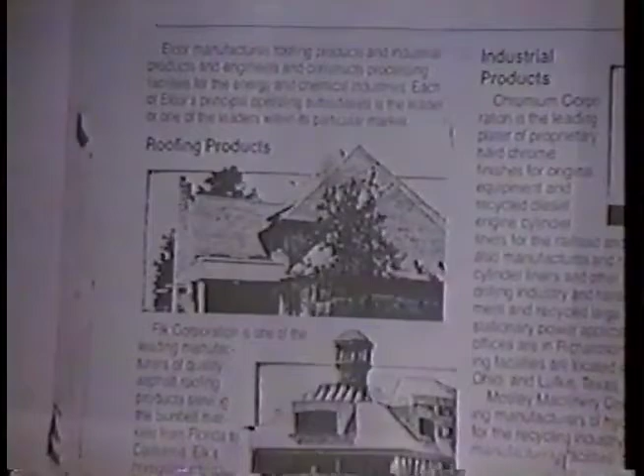We are owned by a larger company, the Elcor Corporation. They have subsidiaries in roofing products. We do have fiberglass roofing plants in the south and on the west coast. That seems to be the biggest subsidiary. We have an industrial products group, of which we are a part. We're also into engineering and construction of cryogenic technology and natural gas processing equipment through our ProQuip Corporation division. Chromium Corporation is the largest in its field and has been a leader because of its relationship with the OEMs for a number of years.

As I said, we do have a working relationship with Cooper on new parts. That was formally announced in 1985. As a result of Cooper's requirements, we are also nuclear certified. That means that we have a system in place for the tracking and meeting all the requirements necessary to do work on nuclear components.

But what we want to talk about today is chrome itself, how we do it, not so much why it works, but we'll touch briefly on some of the characteristics of chrome: how it works, why it works, and our particular process for finishing. One thing to keep in mind through this whole thing is that chrome is the hardest metal you've got going in the operation of your engine.

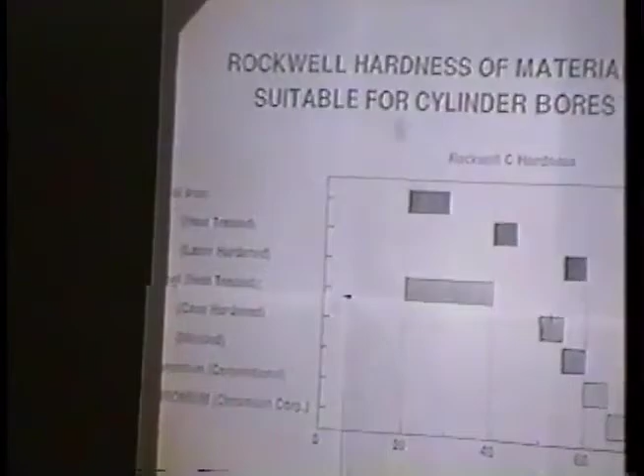Okay, when we talk about chrome, inherently you're talking about the hardness of the metal. Here we have a chart which compares, according to Rockwell C hardness, cast iron, heat treated and laser hardened.

I didn't get all my stuff together here.

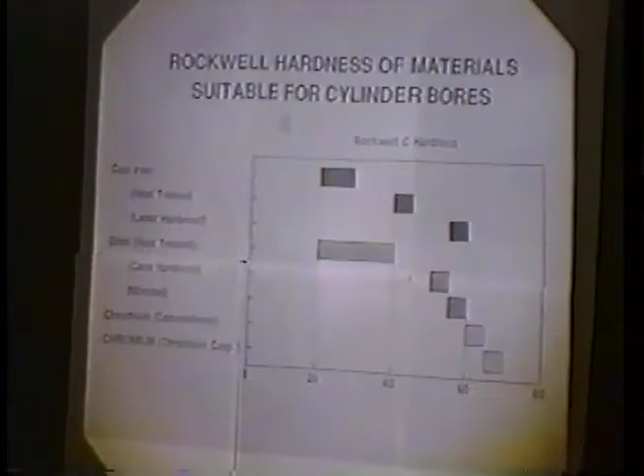Which ranges between 20 and 30 Rockwell.

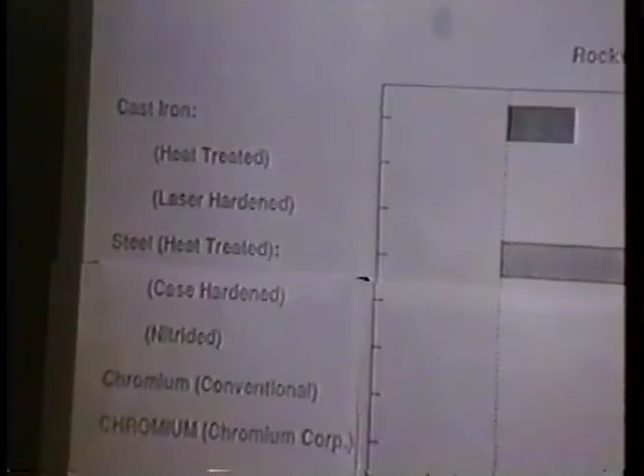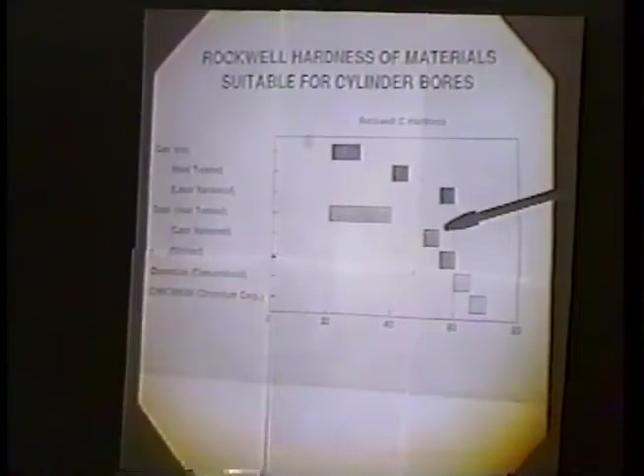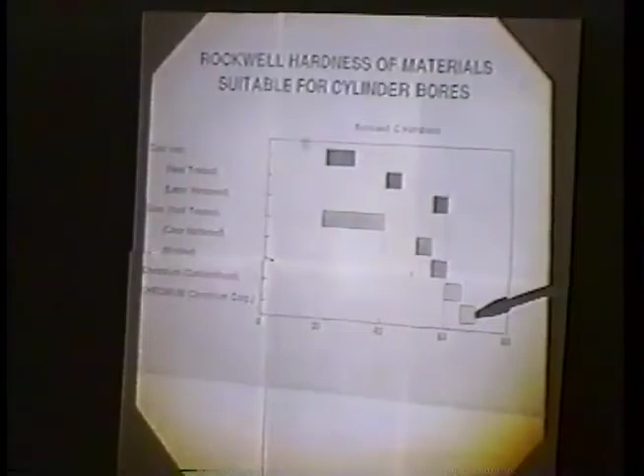And then you have the heat-treated steel, case hardened and nitrided, with those hardnesses out here in the 50 to 60 range. And then conventional chrome plate and our proprietary chemistry. The hardness of chrome can be controlled by the type of chemistry that you use in the plating bath itself.

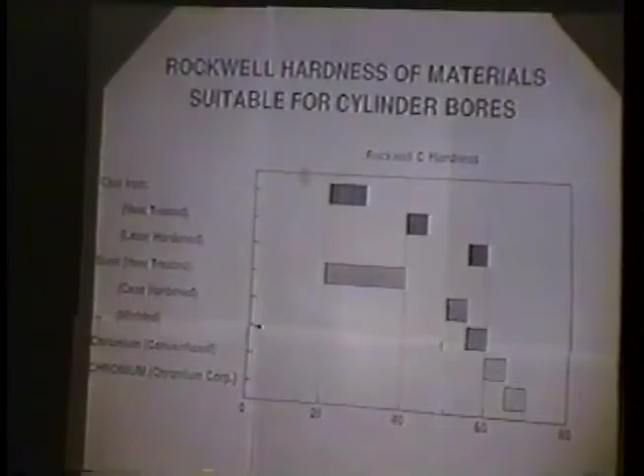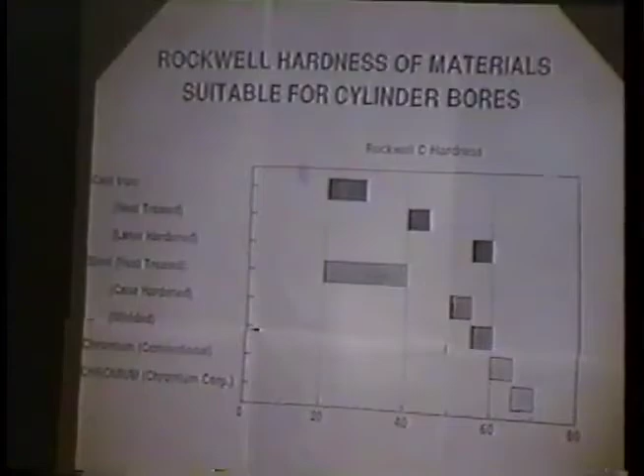Since we've been in the business for as many years as we have, we've developed our own chemistry, which has some added benefits to it, basically resulting in a little bit of a harder chrome product than the conventional, or what you might call off-the-shelf type of chemistry that anybody can buy from Harshaw or DuPont or those kind of people. And that's generally the chemistry you'll find in a lot of the shops around the country, because there's no real chemistry involved with it. You just put it in, that's the way it is.

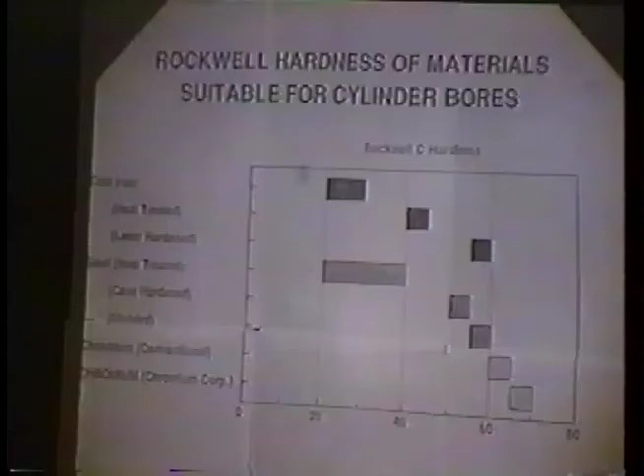But with ours, there's a great deal of maintenance that's required, and we do employ chemical technicians in all the facilities to keep up with the chemistry. Relating the hardness to specific other types of metals, the hardness ranges on the Knoop scale from 400 to 1100 Knoop, or 41 to 72 Rockwell C, which you saw on the other chart, dependent upon the chemistry.

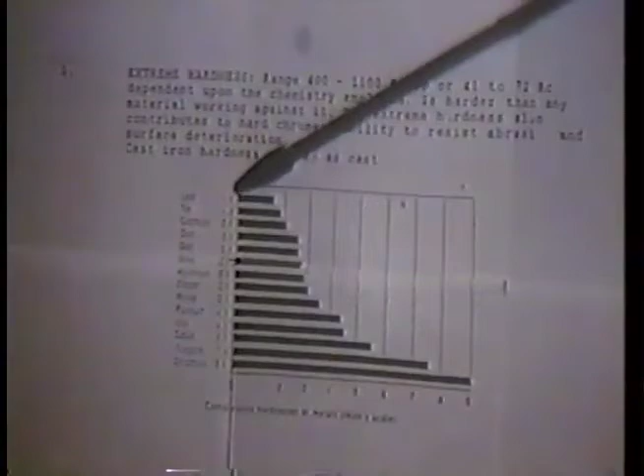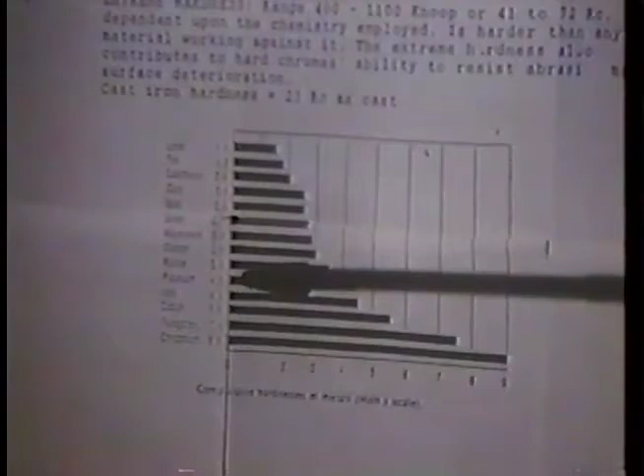This is a scale of various metals, starting with lead, working its way on down to chromium, and ranking those metals in degree of hardness against one another. In the center here, you'll see copper, nickel, aluminum, going on down through cobalt and tungsten, and chromium still being quite a bit harder than tungsten is.

One of the other good things about chrome is that it is a very good conductor of heat. I didn't ask, can everybody see that okay? Specifically, it will conduct heat 5.6 times greater than cast iron will, 6 times greater than ordinary steel.

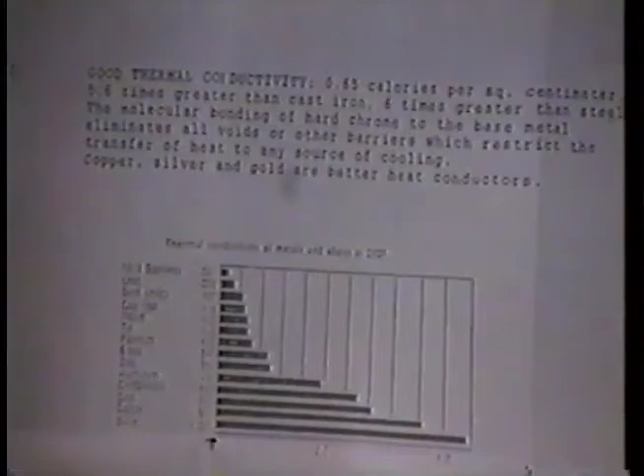The molecular bonding of chrome to the cast iron or the base metal itself eliminates voids and barriers to the transfer of heat. It is a molecular bond, and you'll hear that later on as we get through this. Molecules of cast iron combining with molecules of chrome give you a bond strength in excess of 40 up to 60,000 psi, with the metals intermingled like that. So you have no interface basically between the two metals. You have a combining of chrome molecules and cast iron molecules in the process.

Whereas with sleeving or other types, spray metallizing, those kinds of things, you do have a direct interface between the two metals that you must deal with, particularly when you're talking about heat transfer. It does affect heat transfer. Voids do create barriers to the transfer of heat, and you'll see that a lot, as you probably know, in sleeve work in particular.

Additionally, chrome has good corrosion resistance. It isn't the ultimate for corrosion, because as you'll see as we go through this, there is some micro cracking that takes place that does allow some attack over a period of time, but being as hard of a metal as it is, it does provide, in most cases, adequate corrosion resistance, particularly from periods of shutdown and startup where you have a lot of condensation accumulated and things of that sort.

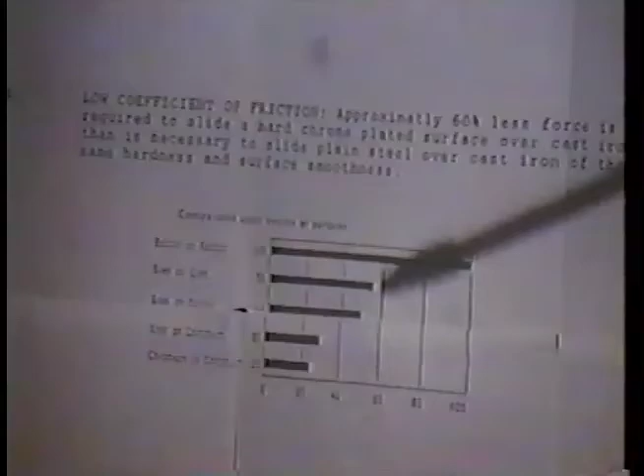Hard chromium also has a very low coefficient of friction. And you see on this chart a comparison with Babbitt on Babbitt, steel on steel, steel on Babbitt, and steel on chromium, and then chromium on chromium. It takes approximately 60% less force to slide a hard chrome-plated surface over a cast iron surface than it would if you're running cast iron on cast iron or steel on steel. Chrome, being as hard as it is, also has some natural lubricity to it.

Some other technical factors which explain why it is such a good product for rebuilding is that it does have a very high melting point: 1900 degrees centigrade for chrome compared to 1540 in cast iron. But more important is the fact that it does have a rate of expansion equal to, or nearly equal to, that of cast iron.

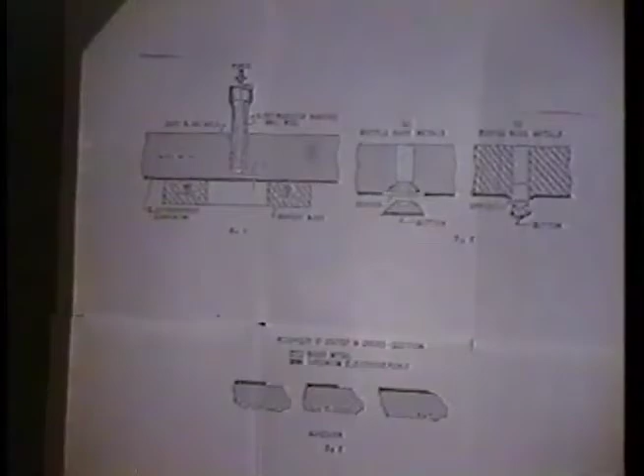Now we talked about adhesion, and I did mention that bond strengths of 40 to 60,000 psi are ordinary. In our process, we prove adhesion periodically through the production process. Unfortunately, it is a destructive test. We actually take a liner out of process. It isn't one that's put in the process specifically for the purpose of testing. It is a regular ordinary production liner.

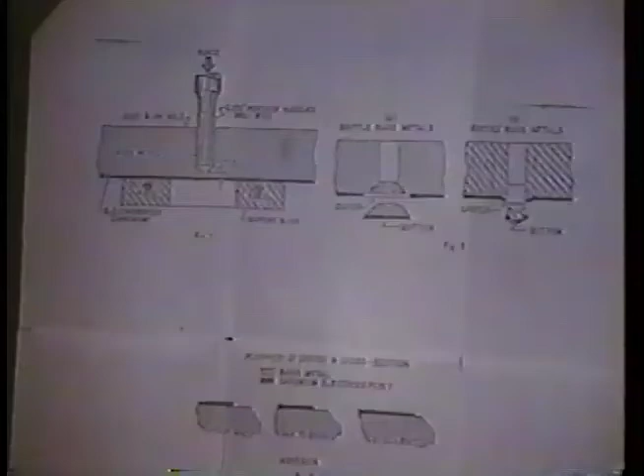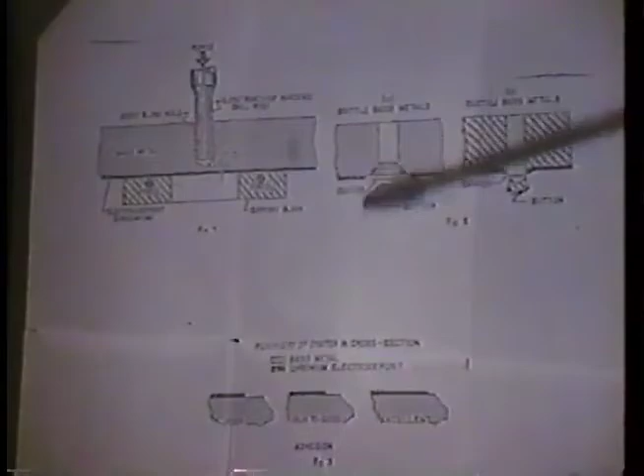And we cut a coupon out of it, just like this. This is one, as a matter of fact. Drill through the back of the coupon to within 1/16 of an inch of the chrome surface itself, and then with a hydraulic punch or press, we punch a button out of that surface. And that button is then checked, as well as the crater that was created by that process. And I'll pass this around, you can look at it very closely.

What we look for is the chrome actually adhering to that surface, hanging on to that surface, where as much pressure is exerted to crack that off and bust that off. You look at the formation of the way it cracked from there. And you'll see in that the chrome, that's a water jacket side of that particular liner. And then we rate them from poor, fair, good to excellent.

And you can see the difference here, particularly in this area. The black lines there being the chrome, and it did not adhere to the base metal in that situation. Here it tried to, but it did not completely adhere. And here there's just very little distinction between the chrome layer and the cast iron boundary when it's fractured away.

But this test is the only way you can truly test adhesion. And what that does is prove the process itself. In other words, the process has steps A, B, C, and D. And if those steps are performed correctly, then good adhesion is ensured, and we prove it and test it in this manner. So that part of the process has to be very well controlled to end up with a chrome product that'll stick. And that, of course, being the most important part of it.

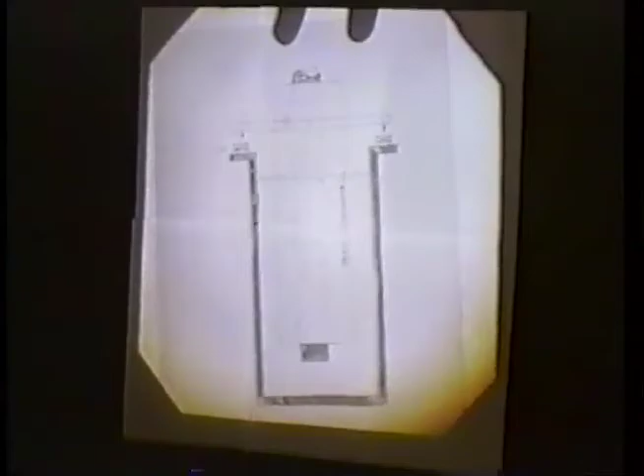Once the pre-plate process has taken place, then we begin plating the liner itself. Is the pre-plate what we're seeing on this one, or is that the finished plate? That's actually the finished plate. That is what we call the tank finish.

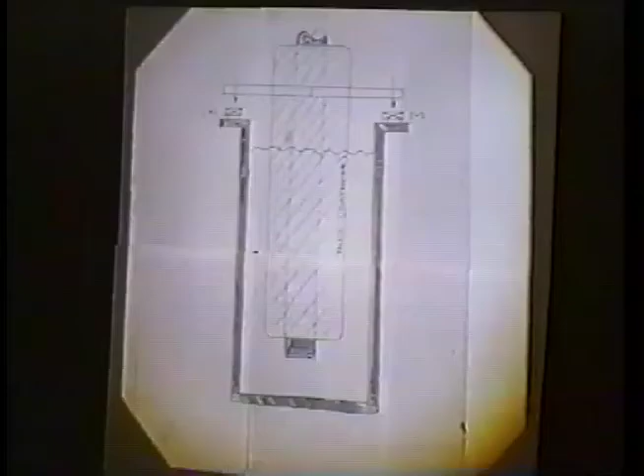I'll back up here a little bit to answer your question. Say this is the surface of the liner, and in a two-cycle, of course, you have the ports opening up. Besides preparing the surface of the bore itself, I don't know, in the Alphas you don't have that problem, but in preparing the bore surface itself, you must also prepare the edges. Wherever there's a sharp edge, chrome will not plate.

And as you see on that test coupon, there's like little balls. And that's characteristic of chrome plate. It plates in little balls. So when it gets to a sharp corner, then it tends to plate away from that corner as it's laying down its layers. And you end up with a big corner out there that then breaks off. It'll just come right off of itself at that corner, exposing that corner to more attack, or higher wear than the rest of the bore.

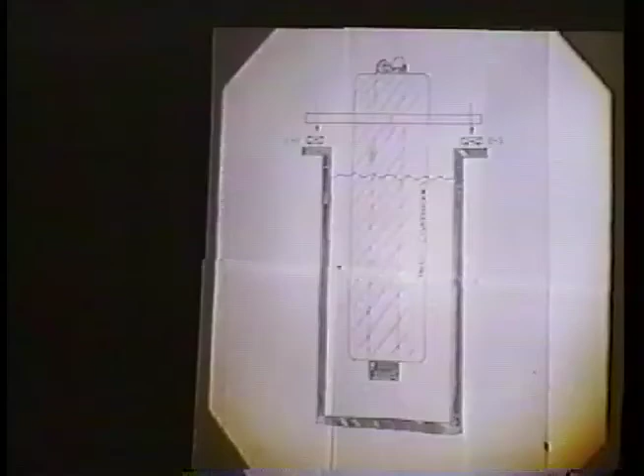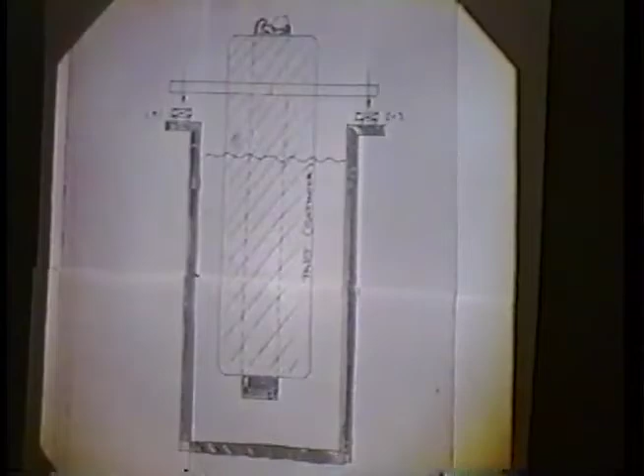It needs to be in a lined tank to hold the quantity, and it also must be bussed to supply up to 10, 15,000 amps, depending upon the size of the part, at 6 volts. So you need quite a setup just to start chrome plating the liner. And additionally, the liner itself must be fixtured to what we call a rack, which conducts the electric current. The part itself, the liner in this case, becomes what is known as the cathode.

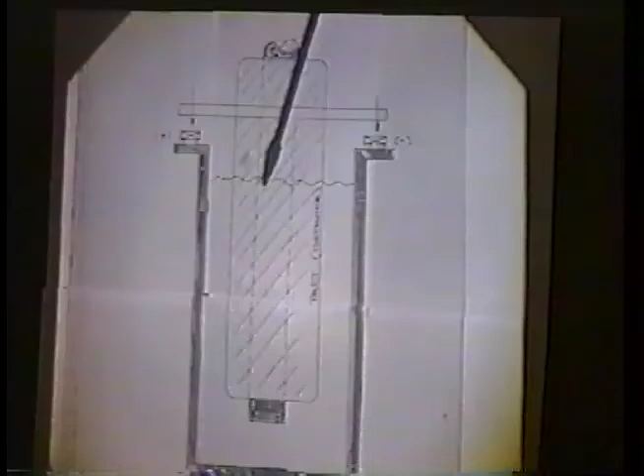And inserted down through the center of the liner is a tube that has very definite spacing. It's big enough to allow at least a ½ inch of spacing down to as much as a ¼ inch of spacing between itself and the liner surface that you're plating. How critical is that spacing? Absolutely critical, even in that small an area.

What happens to the chrome plating surface on a liner if one side of the liner is a ½ inch and the other side is only 3/8? One side will put more chrome on than the other one. The distance controls the rate of deposition as well as the amount of chrome that's applied. So it is possible to actually change the center line of the bore if that anode itself is not centered in the part.

And you can see, depending upon whether the cylinder is set up in a V configuration where you have a thrust and anti-thrust side to it, you can see the wear develop just exactly that way. The wear isn't developing on the top side. May very well be that the chrome deposit goes in. You should see the wear develop more on the bottom side, on the thrust side of the cylinder, than you do on the top side.

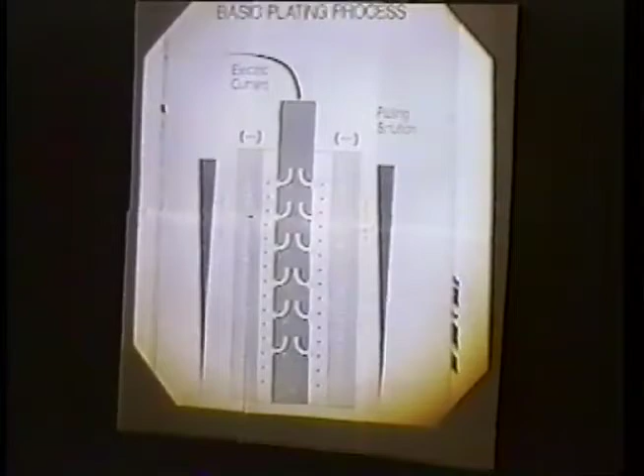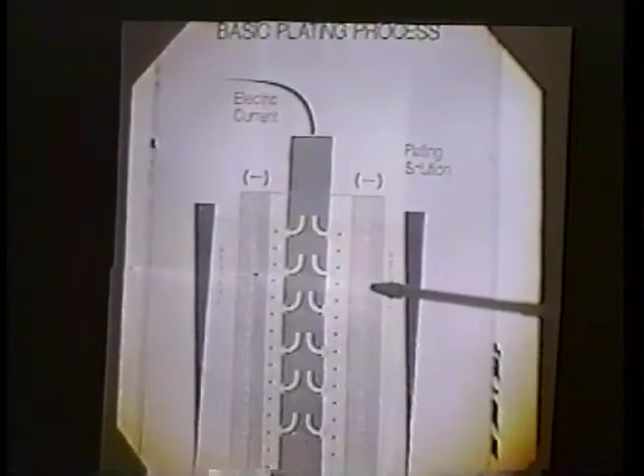But electroplating is basically using the electricity to provide positive and negative fields that will attract. So with the part itself being the cathode, it conducts electricity, charging the molecules of chrome to the positive side and thus bonding to the negative electrical charge of the part itself.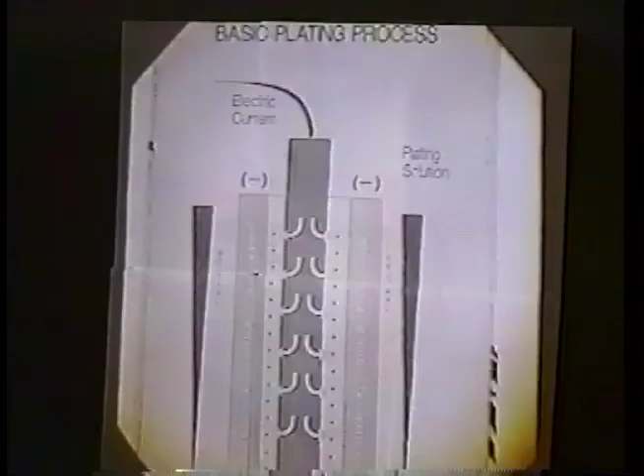The positive electricity conducted through the anode is sent out through the chromium solution, charging it and thus activating the negative surface of the part, causing the molecular bonding of the two. Sometimes compared to a weld, but not really quite that.

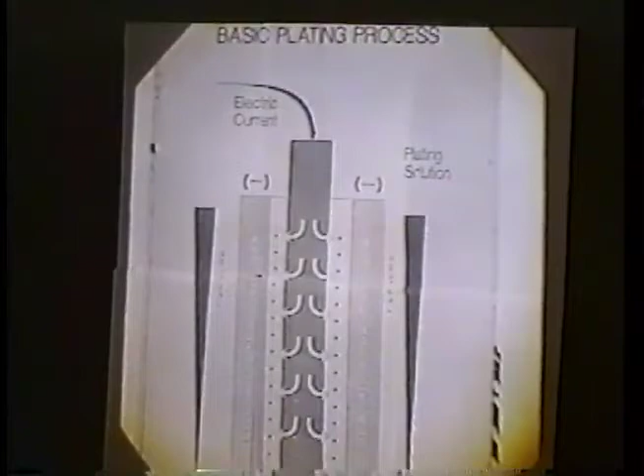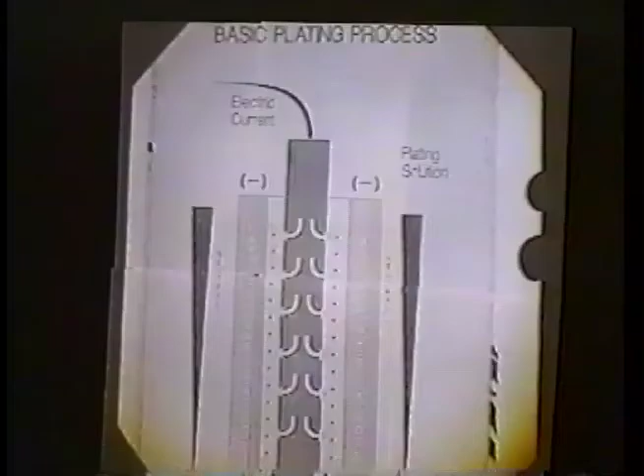Not really quite that good. I say good, but it's not correct either. But basically, the principle's almost the same. How close of tolerance do you allow on that spacing? A 16th of an inch. Top to bottom must be centered within a 16th of an inch, and they use calipers to determine that.

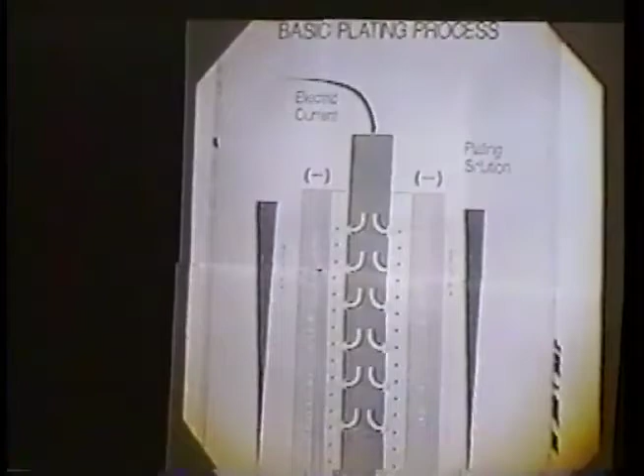And the rack itself on the top has actually 8 to 12 adjusting bolts where they can torque the anode any way they want in order to line it up. That's checked on every part before it goes in the tank.

Let's say you're a 16th of an inch off. How much difference is the thickness of the chrome from one side to the other? I can't answer that specifically because there are some other things that have to come into play. How thick was the plate supposed to be to start with? Which means how long is it going to be in the plating tank? You can see it on heavier thickness of chrome.

Now, the OEM spec for maximum chrome plate is 120 thousandths. So if you're going to plate 120 thousandths, because it's all a time process, and I'll get into that a little more, at a rate of plate of 1.5 to 2 thousandths an hour, that's 60 hours of plating. A lot can happen and you're building up an awful lot of material.

It would be much more obvious the thicker the plate required. With a 30 thousandths plate, you probably wouldn't notice 10 thousandths, but that's 30%. So 30% on 120 thousandths is about 40 thousandths. So it could change it that much, and most four cycles will tolerate maybe 5 thousandths of change in the center line of the bore and the piston. That's at least what GE tells us for their particular engine, which is an old Cooper.

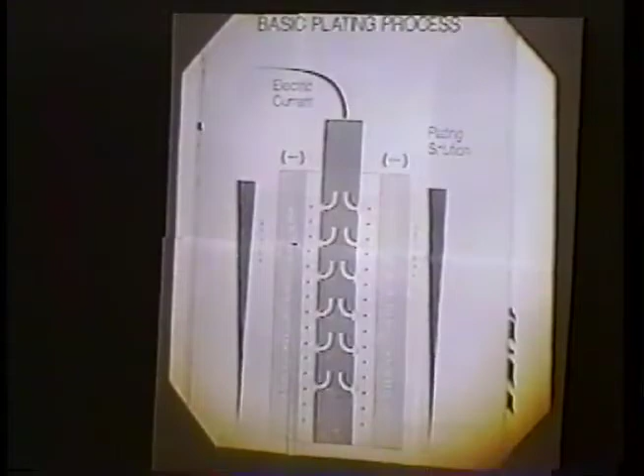So as I said, the plating process itself is a time process, and the chemistry being used will control the amount of time it takes to plate. We consider our chemistry to be high speed, which on the locomotive liners, the high-speed diesel liners, will plate as fast as 3 thousandths an hour. In a high production situation, the difference of a thousandth does mean quite a bit. A conventional chrome plating bath will plate basically 1 to 1.5 thousandths an hour.

So one of the things we must do in preparing the liner is, of course, hone that bore to clean up that surface, straighten it up, and line it back up as well, within 2 thousandths out-of-round and taper both, and then plate so that you get back to original size plus grind stock on top of that. A 30 thousandths plate basically is a new liner. Most worn liners will go 60 to 100 thousandths without any problem. So you're looking at 15 to 30 hours of plating time.

And during that time, several factors must be controlled. Temperature of the bath cannot fluctuate more than plus or minus 3 degrees. The amperage can't fluctuate more than 100 amps. It must stay constant within half a volt, basically 6 volts. The impurities in the plating tank can't rise dramatically either. The primary impurity in the plating bath is iron, which is etched off the part itself to some degree. 3 grams per liter of iron is a high level of contamination, enough to affect the quality of the plate.

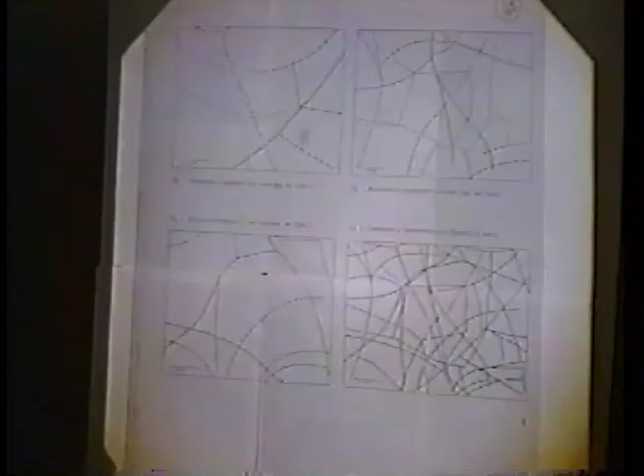And we'll be talking about this more as we get into the finishing of the liners. But chrome, being as brittle and as hard as it is, does stress relieve itself through the plating process. So as you start out the process, the chrome layer will reach a point and then it'll fracture. They call this micro cracking. It isn't readily visible with the naked eye. You do have to use instruments to be able to see it at that point.

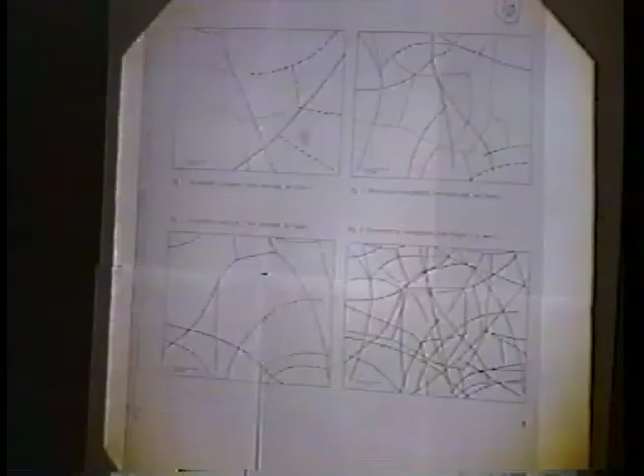But as the layer continues to develop, as it continues to build the thickness, on top of that first point where it's stress relieved, it builds another layer and then stress relieves that. So you get multiple layers of stress relieved chrome throughout the total thickness of the coating. And again, you can't see these until the liner's been stress relieved again, maybe in the operation of the engine. And then what you end up with is what I'm sure most of you have seen, and that's a chicken wire pattern on the chrome surface.

That's really the better picture of the two here. What has happened there is that liner has been subjected to heat through a failure in the cooling system or something, and it stress relieved the chrome, and that pattern then reveals itself much more obviously on the surface. The chrome actually cracks. Is that chrome coming off? No. It's a natural occurrence. All it did was exaggerate it. No, it doesn't affect adhesion. The cracks look like they're pretty wide. Yeah, they do. I agree.

I know what you're thinking, because a lot of people, that's the first thing they think. Well, they wouldn't use that liner. But it does not affect adhesion, because adhesion takes place in the first 4 seconds. Okay, what does it do then? Well, of course, you've got more channels that are going to hold oil and those kinds of things. There's other reasons for changing the liner. You're going to get higher ring wear with that kind of thing. Yeah, I don't disagree. The chrome would not be any more subject to coming off at that point, not any more than it was when you started it up.

The bond has already taken place, and it is a molecular bond. You don't have anything to interfere with that part of it at that point. In the first few seconds of the plating process, bonding is established, unless there's a contamination somewhere on that bore. But from that point on, the chrome is stress relieving, and all the high heat condition did was exaggerate and stress relieve that chrome a little bit more. It didn't affect the adhesion, it just affected the tension of the chrome itself.

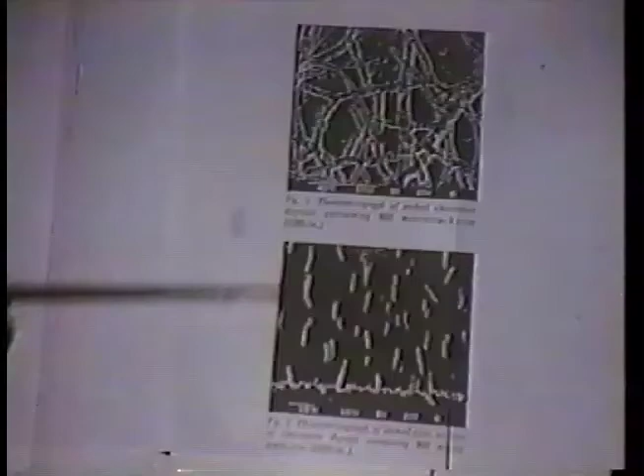We use what's called reverse current etch porosity. We use this, but not to the degree that most of the other platers in this business do. It's an easy process. You put the liner back in the plating tank, reverse the flow of current, and you dissolve the chrome off of that surface. It starts at the line of least resistance, these cracks, and it starts widening and dissolving away these cracks to widen them and make them deeper. And that's the whole basis for the porosity.

Some slight changes in porosity will get you away from that chicken wire pattern into what they call a pinpoint pattern, but that's a method that's used by most of the platers in this business to get the porosity. All of the control factors, temperature, amperage, and so on, play a part in the deplating process equally as they did in the plating process itself. So they are all important just to dissolve the chrome off that surface to establish a basis for porosity.

The biggest concern is that you can apply a finish to that hard chrome that will operate under the conditions of a particular type of engine, the location, particular environment, and things of that sort. We use a method called mechanically induced porosity, where in addition to the microcracking, we impinge the chrome surface with hard grits through a blasting process that's controlled for pressure, speed, feed, and so on and so forth.

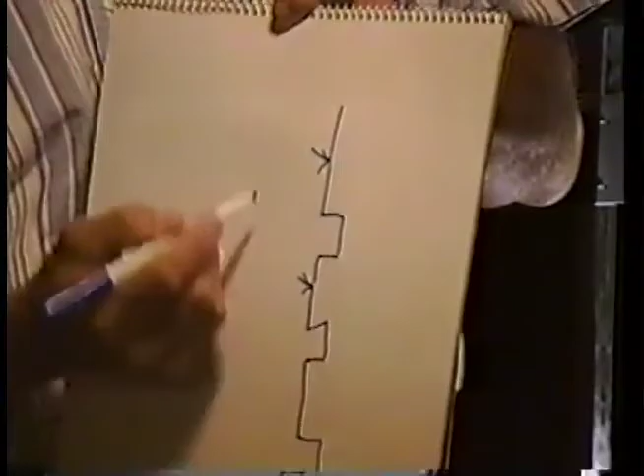One of the things that we must do to provide a good running surface is to give you as close a relationship as possible between the percentage of porosity, the number of pores in that chrome surface, and flat ring-bearing surface. Ideally, if we have 30% porosity, meaning 30% of any square inch has a hole that will retain lube, you should have as close to a 70% flat surface to support the rings as they travel through the bore. That's the ideal situation.

With reverse current etching, you'll note that there's a lot of rounding. If you can imagine how an Alka-Seltzer dissolves in water, it gets very ragged and rough. So there is less of a relationship between the real porosity and the ring-bearing surface than you would have applying porosity through a mechanical method, because you can control the depth, the size of the hole, and its sharpness. Those are your oil retention pockets, in addition to the microcracking in that chrome surface.

So you're striving to get as close a relationship between the ring-bearing surface and the porosity, through a combination of honing and blasting, or whatever it takes. Now, this is an example of a comparison between reverse current etch porosity and mechanically induced porosity. Basically, the two processes are the same as far as preparation and plating are concerned, and after plate there is the finish hone process step.

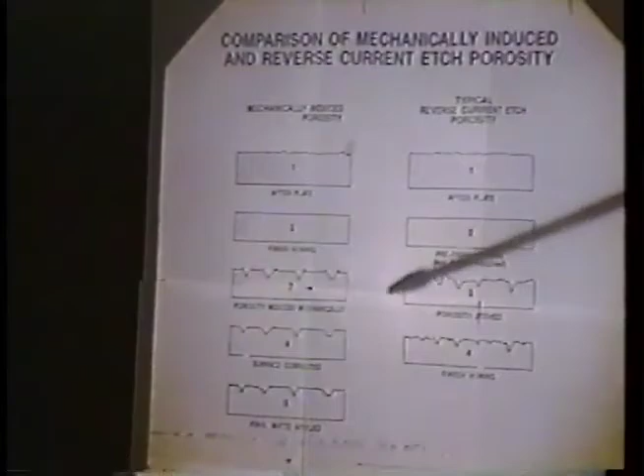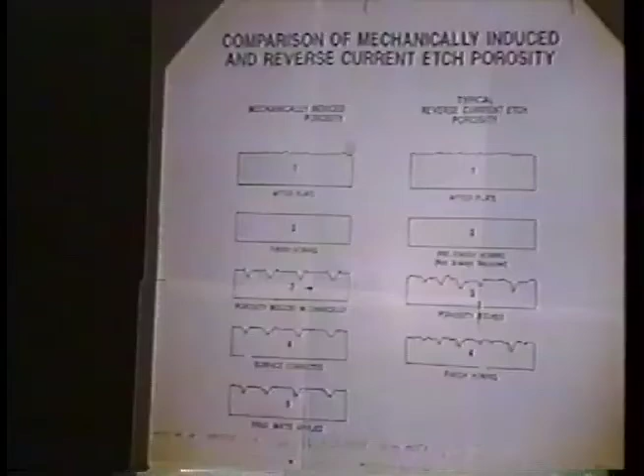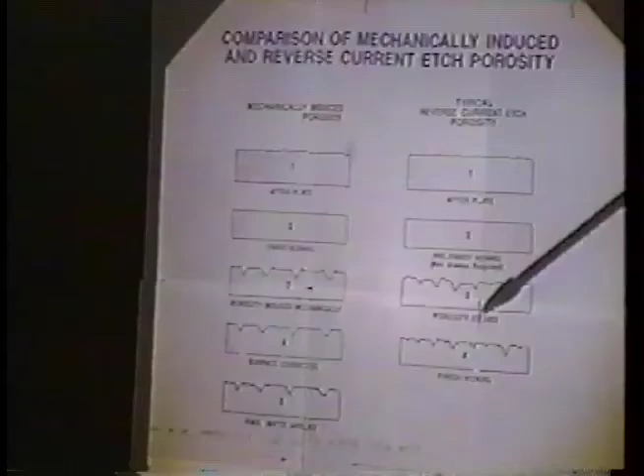With reverse current etching, it goes back into the plating tank, the microcracking is exposed through the etching, and you end up with rounded features, not as well controlled as mechanically induced. With mechanically induced porosity, you may go back into the blaster. The honing imparts porosity as a crosshatch and reveals more pores. A final honing corrects the surface and eliminates burrs from blasting, but with reverse current etch, they hone it and you still end up with rounded pockets and less ring bearing surface than mechanically etched.

In the diesel locomotive liners, we come back and put what's called a final matte to it, which is a 240 grit aluminum oxide blast on the surface that roughs it up slightly, but it's mainly used to seat the rings, hones the rings in pretty quick. And then it's gone. That surface is gone, and you're working on the other porosity that you put into it. What was the grit? 240, at high speed in a blaster.

Are you using any liquid in it, or just dry blast? I just dry mine. Do you have any idea what the porosity ratios are in oil liners? No, I really don't. We could find out, and I'll show you how to do that. In fact, you can find out yourself. I'll teach you how to do that. But probably, I'd say 30 to 40% you could probably expect. Why, is it four cycle?

That's right. 4 cycles run wetter than a 2 cycle, so you don't need quite as much porosity. They naturally run wetter. The EMD liner, for example, and I'll show you one of our finishes that we developed for the General Motors locomotive with a whole lot of controlled porosity and zone porosity as well. But we came up with this pattern because we dried up the 2 cycle. We didn't put as much porosity into that chrome surface, so it won't retain as much.

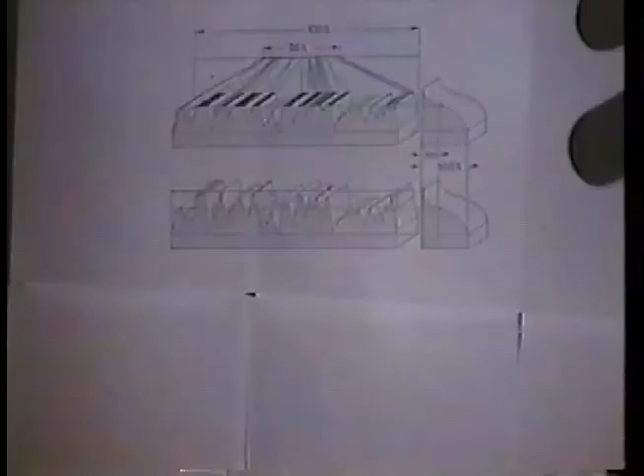In the mechanically induced porosity process, we do what's called a semi-plateau honing. It gets back to correcting the surface to develop a closer relationship between the pores and the flat surface. So, although it's not a true plateau hone finish, it's what we refer to as a semi-plateau hone finish, because we are actually coming back and correcting that surface to get a more direct relationship with the amount of porosity that's there. Mechanically induced porosity.

This is, you saw in that picture, an example of reverse current etch porosity.

Mechanically induced porosity under the same magnification looks more like a moonscape. There are very definite pockets to it, as opposed to the chicken wire or alligator pattern or what have you. It acts more like a blotter than channeling the lubrication through the chicken wire pattern.

Glass beads, you said, with 240 grit, did you find a break-in? We don't do that on the big liners, but on the high-speed diesels we do. Or you don't do it on ones like ours? No, on the big ones. I don't think they're doing it on the Alco factory units. Are they coming to you looking real gray? Yeah. Okay, then they've matted them.

Do you get some initial wear on your rings with that surface? That's the intent, to actually hone those. It's actually initially destruction to the ring. No, it seats the rings to that particular bore. But I mean, you get some wear on the rings. Just surface wear, yes. It smooths that liner out as that wears off.

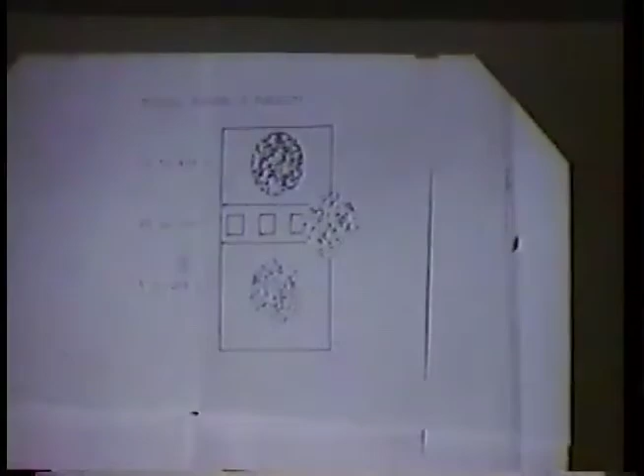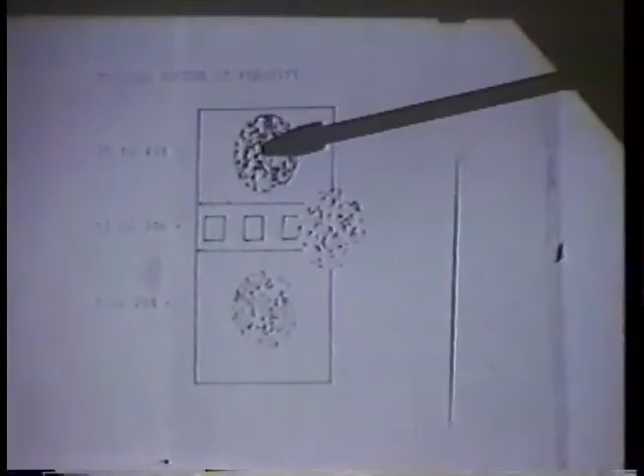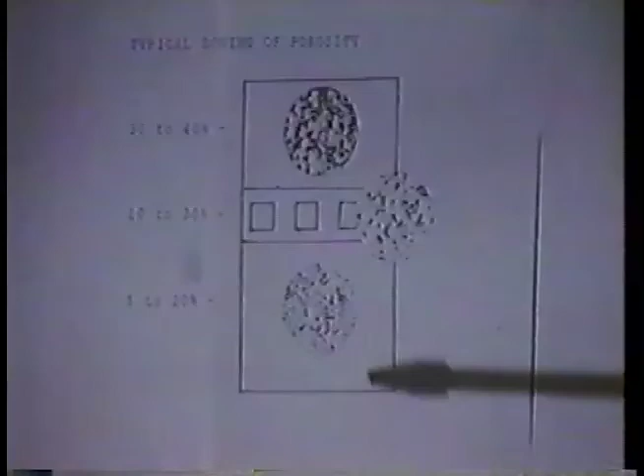But basically what that's saying is that in any 1 square inch of this cylinder, 30 to 40% of it has oil retaining pockets.

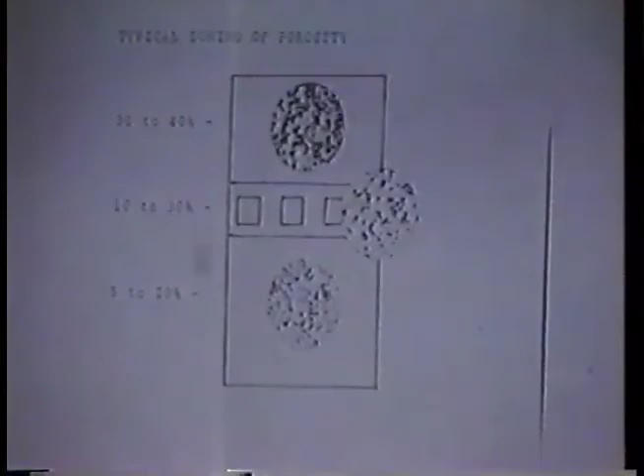Is it possible to check that hardness on a porous surface like that? Actually, the best way to check hardness is they take a cross-section off of it and they mount and polish it. They actually polish that surface and eliminate most of that before they check the hardness when they do it in the lab.

What kind of porosity, or not porosity, hardness should we expect to see in chrome? And I'm sorry, what finish? In your finish? In our finish, you should see it ranging around 70, Ron, let's see.

70 to 72. Conventional chrome plating baths will range 60 to 65 would be maximum. We're about 10-15% harder than a standard conventional chrome plating chemistry.

How hard should the ring be that runs against this? We advocate just basic ductile iron rings. Ductile iron rings. Certainly don't want to run a stainless steel ring around on it, but it isn't necessary. The investment isn't necessary. Ductile iron rings will run fine as long as you have the porosity and the finish correct for the engine or for the operation.

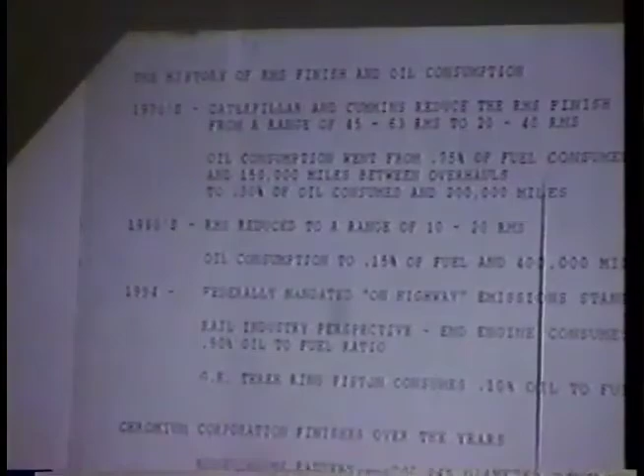This is a little history on surface finishing and its effect on oil consumption. This was done by International Harvester. It's just kind of a history on RMS finish. RMS is root mean square. Another term is RA, which is the arithmetic average of several readings taken on a surface. It's a measure of smoothness of a given surface. To put that in perspective, an ordinary pane of window glass is about a 7 RA.

In the 1970s, Caterpillar and Cummins began reducing the RMS finish on their cylinder bores. Now this is on-road, over-the-highway diesel engines, from a range of 45 to 63 RMS to 20 to 40. In other words, they cut it about in half. And the result was that they did see a reduction in oil consumption from 0.75% of fuel consumed in 150,000 miles to 0.3% of fuel consumed and 200,000 miles. So they were able to extend the life of the engine while reducing the oil that was consumed in the life of the engine.

In the 80s, they further reduced it down to 10 to 20 RMS. That's pretty smooth. And again, they had a comparable reduction and a doubling of the life of the engine. In 1994, the federal government got involved in mandating some emission standards, and a good, controlled finish of porosity in a cylinder bore can contribute to some of the reduction in engine emissions as well.

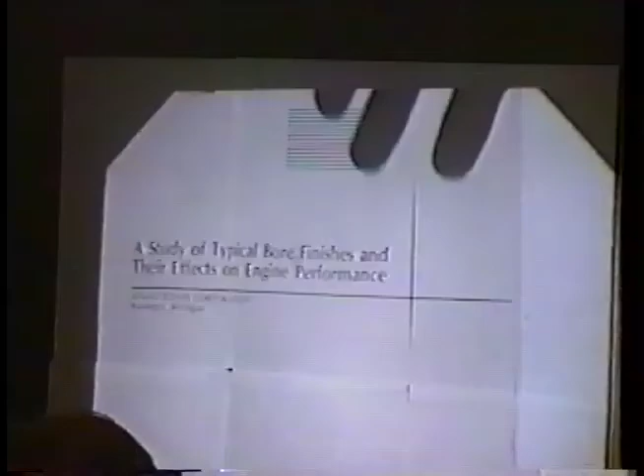Let me do this here first. This is it? I think this is in that paper. This is a paper that was done by Sealed Power. A study of typical bore finishes and their effects on engine performance by Sealed Power out of Muskegon, Michigan. They are manufacturers of rings. Is that page in that paper that you wrote? No, it isn't, but you can copy it if you like. I thought it was, but it isn't included.

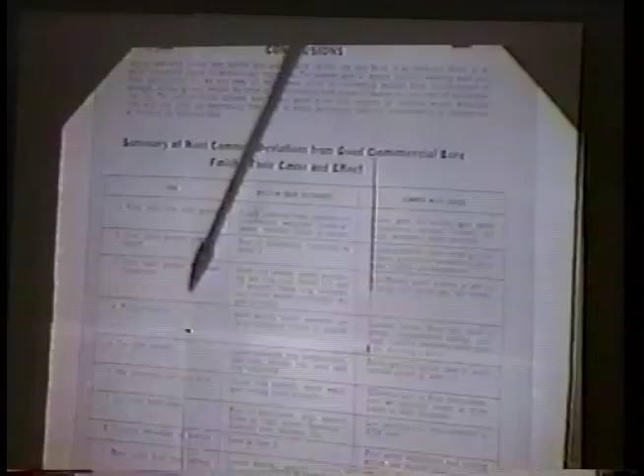This is a cause and effect type of thing, dealing primarily with crosshatch and plateaued finish. Keep in mind that plateaued finish is a corrected finish that provides you with ring bearing surface.

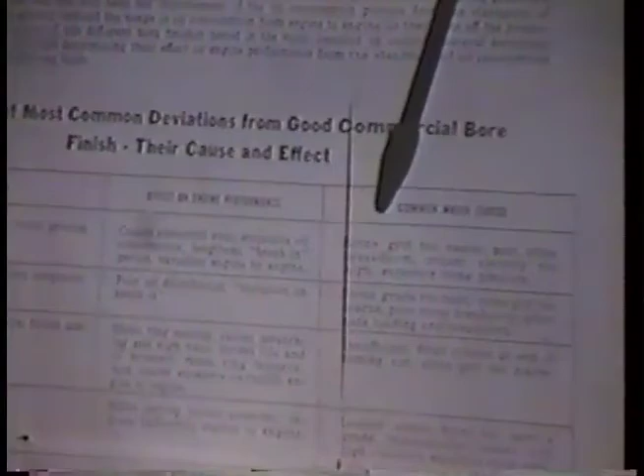So, number one, wide, deep crosshatch grooves will cause abnormal wear, excessive oil consumption, lengthens break-in period, and it will cause a variation from engine to engine in the performance. Major cause: stone grit too coarse, stone breakdown, coolant viscosity too high, excessive stone pressure.

Number 2, crosshatch grooves irregularly spaced, in other words, not uniform in distance, will give you poor oil distribution and variation in break-in. And what causes that? Basically, again, it gets back to the process of finishing or honing that surface.

Crosshatch grooves folded or fragmented slows ring seating, causes scratching and high wear, lower life and oil economy, raises ring temperatures, causes excessive variation from engine to engine.

Plateau burnish, in other words, it's like a hot spot on the ring travel area. Causes slow seating. In other words, what they've done there is that they hit that too hard with a stone or with their finishing tool and turned it a little blue. Slow seating lowers economy, reduces uniformity engine to engine. And what caused that? Again, it's in the finishing process itself. Choosing the right stones, the right amount of pressure on those stones in the process, and even the right type of coolant.

Too little plateau. That means that we're talking about the ratio between porosity and ring-bearing surface. Causes excessive ring temperatures, high wear, shorter life, bore and ring scratching or scuffing.

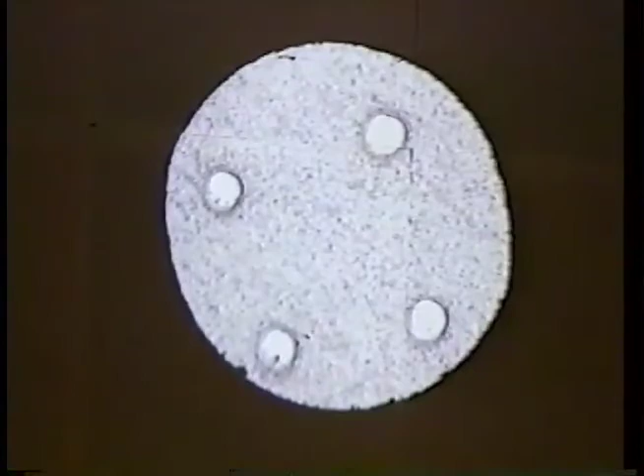Now this, some of you will recognize, is actually Faxfilm with the honeycomb pattern itself. It's one of the bars that's in that sample case. It's like a fingerprint. So what we do is with acetate tape, and I'll leave this with you if you want to use it, with acetate tape and acetone, $2 a can at your auto paint store, you can actually imprint the surface of the bore. We'll do that with some of these samples. With the acetone, and pressing a piece of this tape on there, you can actually lift an impression of that surface to the point that you can mount it and project it.

Knowing your magnification and the distance you are from the screen, you can figure out, and you can actually grid it and get real technical about it if you want to. But after a while, you learn by looking at it to tell what porosity, within a reasonable margin, you actually have. Honeycomb pattern is a bit of an exception.

What I'd like to show you now is what we had talked about. This is an example of reverse current edge porosity after a period of 24,000 to 30,000 hours in a marine application. I was in our Cleveland plant one day, and these liners came in, these were Fairbanks liners, from our customer. And in those liners, they had both reverse current edge porosity and our mechanically induced porosity, both running the same period of time in the same engine. So it was a good chance to get a good sample of what the finish looks like after a period of service.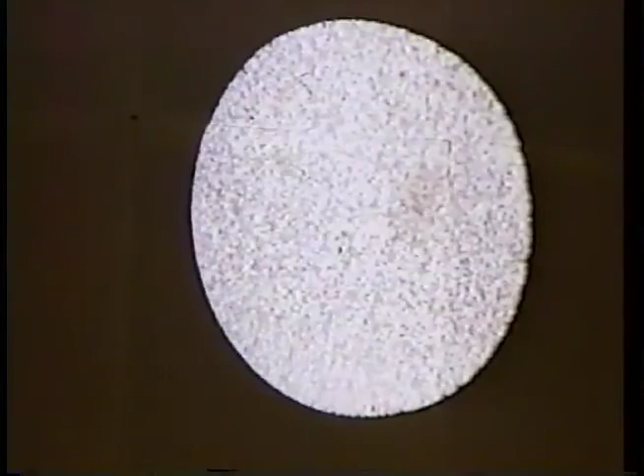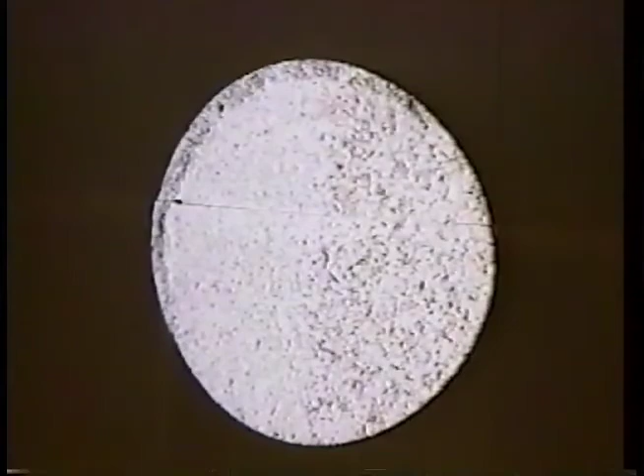I talked about zoning of porosity. This is a good example of zone porosity. This is in a Cooper engine. We got an inquiry from Colorado Interstate a few years back to develop a finish for their two-cycle Cooper GMV engines. They wanted a little more porosity in them. They wanted to be able to retain a little more lube oil because they were having some ring wear problems and things like that. So you can actually see the boundaries where the two degrees of porosity, percentages of porosity, were created in that particular liner. And those are some of the things that you can do with this process.

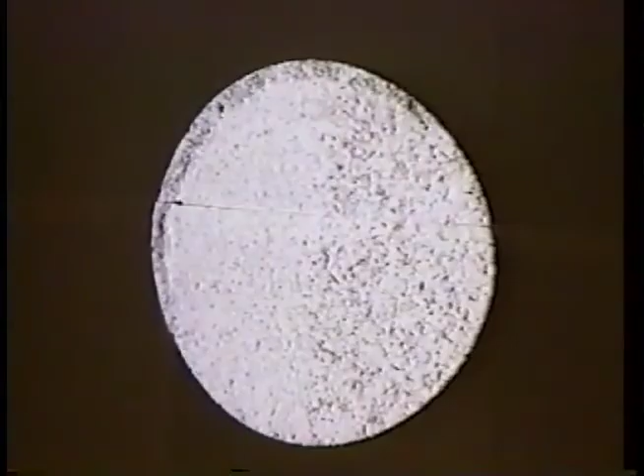On new liners, all of the new liners that we do, particularly for Cooper, we're required to submit fax films with each liner. So we use microfiche projectors primarily as a comparison. We have an accepted standard on one side, and with every liner that goes to Cooper, we must submit 3 fax films from 3 different areas in that bore, and we use this to compare them to standard to ensure that we're inspected in that regard.

So the process will produce a finish that can be controlled, and the system that we have for checking that means that every liner gets checked, so we know that the finish is exactly to spec. Now, to take fax films, I'll show you exactly how to do it.

You want one of those? Where do they go? Which one would you like to see? Any of them would be fine with me. That one up there would be fine. I don't know if I see too much in there, that cross hatch. Okay.

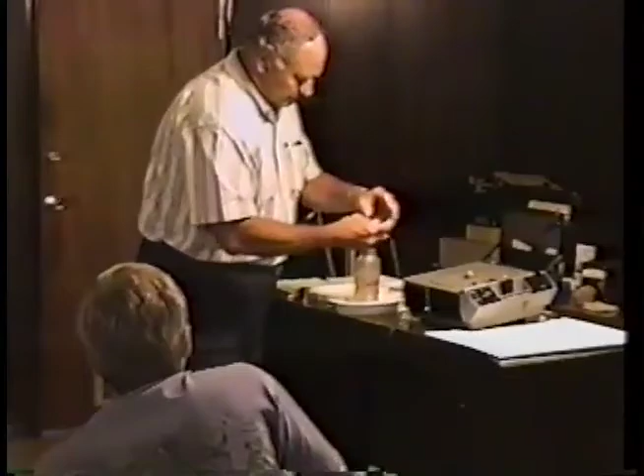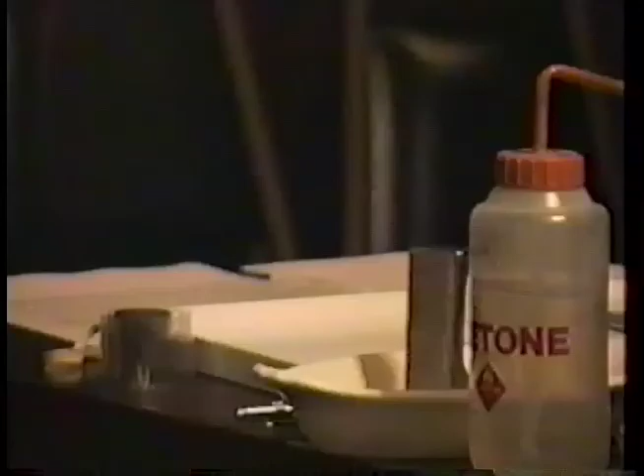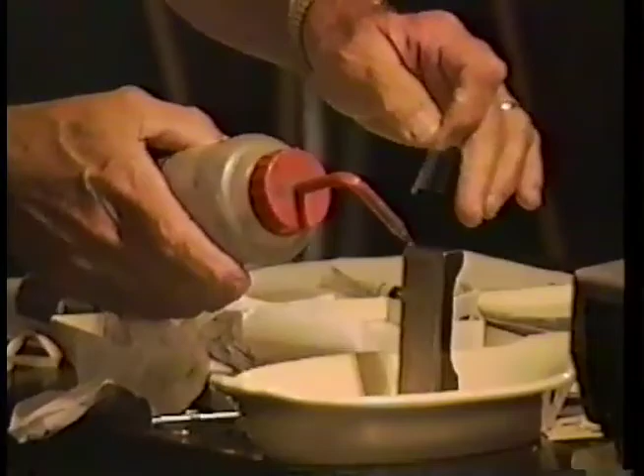Use the acetone to clean the surface first, and it evaporates pretty quick. And then taking a clean piece of acetate, and flowing the solution over that surface. Just keep flooding it. Piece here. Might have gotten a fingerprint in there. And then just let it stand and dry.

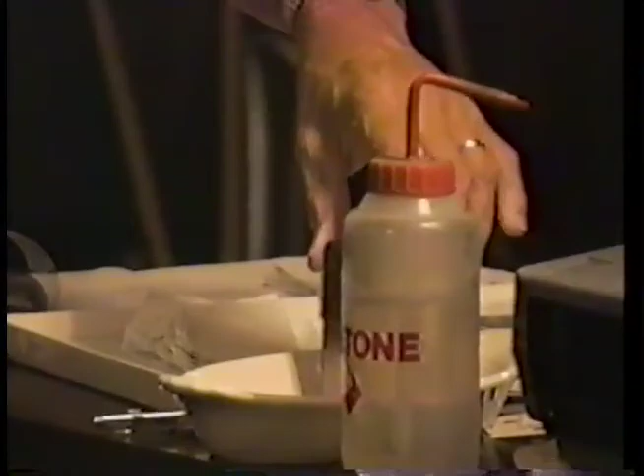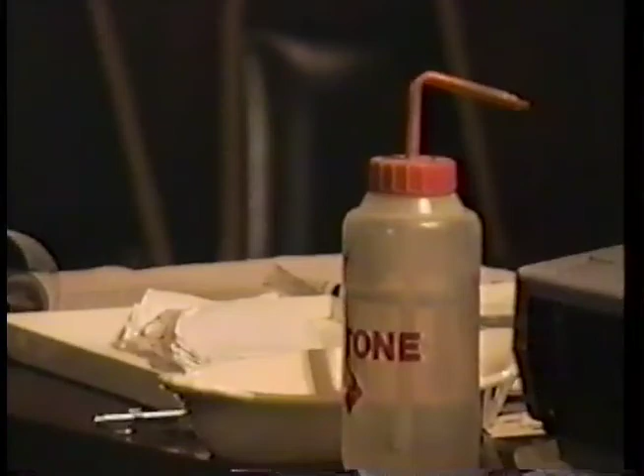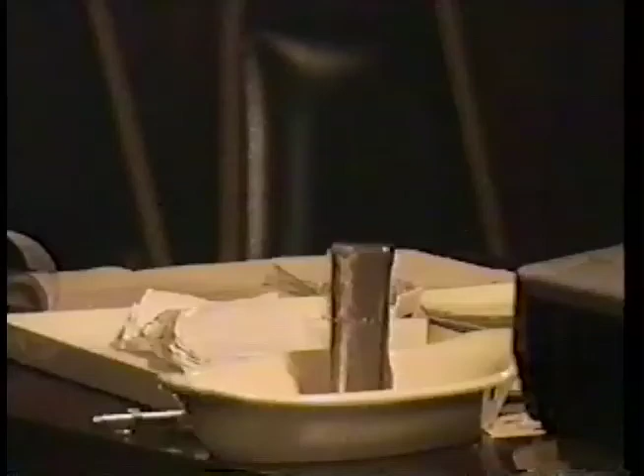When you're working on a large liner, you can get both hands involved, and you can just lightly rub it while you're flushing it with the solution, otherwise it'll get real sticky and you'll get your finger on it. I have instructions on how to do this in writing, and I'll leave those with anybody. But what I recommend you do is, when you first get a cylinder back from being reconditioned, take some fax films off: the head end, below the ring reversal area, and down in the skirt end.

I don't know if you serialize or keep track of your liners that way at all, but you might want to put a number on the liner and put a corresponding number on the tape. Next time there's a question raised in an overhaul, well, do I take the liners out? Do it again, and then put the two up, project them, and look at them. You know exactly what your porosity looks like at that point in time. You can see how much wear, from day one to that point, you actually have in that liner.

I recommend this on new liners as well as rebuilt. And then, after a few minutes, you just peel it off and mount it. These mounts have got room for identification on them. And you can actually see it. Okay? A lot of times what you can't see with the naked eye on there, you can certainly pick up with this tape like that.

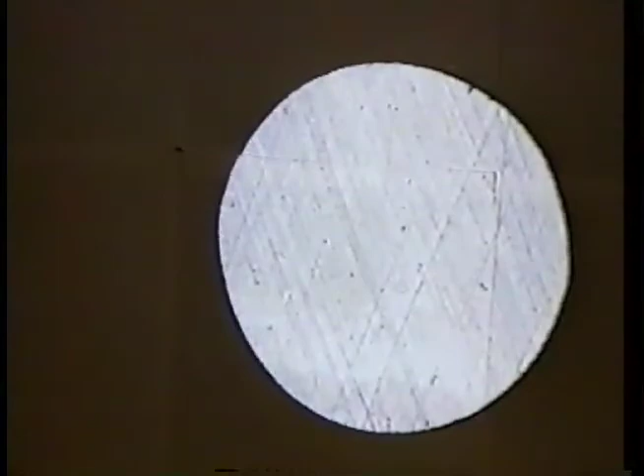If it's got porosity in it, and it hasn't changed a whole lot from the new one, and your ring reversal area isn't too badly dug up, you may be able to use it, put it back in the same hole. Or you may decide that the ring reversal area is too bad and you need to redo the whole thing. What happens if you stick them in a different hole? Well, not all the strokes are the same. And if you're lucky, the stroke might be a little shorter than the other one.

Well, when you change your pistons anyway, it doesn't make any difference because your rings aren't going to necessarily be in the same spot. Well, yeah, but the top of the stroke might vary a little bit, and you might ram a ring through that step and the ring reversal at the top. That's what I say, if you change your pistons, that's not going to be the same necessarily anyway. Well, yeah, right. But if you have any idea that you may reuse those cylinders, I would recommend that you mark them where they came from, or at least with the piston that they came out of. We never use the same pistons over.